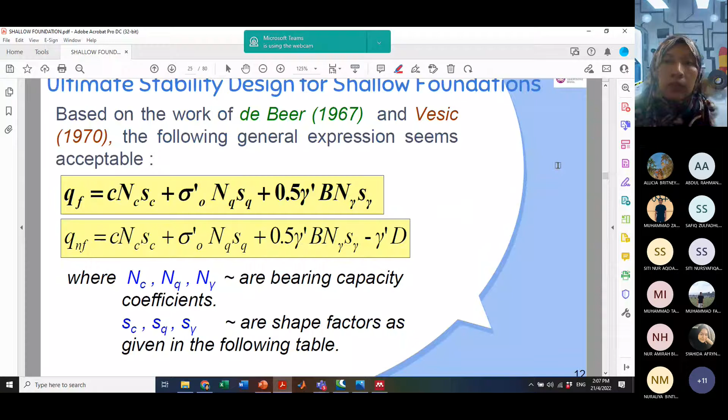So now we go to our main topic, topik 2. Dalam topik 2 ni, apa yang saya nak tekankan, dia lebih kepada applications of geotechnical engineering. For example, one of it is the foundations. Foundation ni, kalau you tengok dalam lesson plans, kita ada 2 types foundations, shallow foundations dan juga deep foundations. So for this week, it's actually on the shallow foundations. Next week punya topik kita nak estimate settlement for shallow foundations. Tapi saya bawa masuk sekali.

So saya akan explain on the theoretical part for the calculations on estimations the settlements. So I leave it for you to have your own, because next week memang you are free available just to do revisions on topic 1 dan juga topic 2. Maknanya dalam topic 1 dan topic 2 shallow foundations memang akan ditanya dalam test 1 awak. So you kena betul-betul buat revisions lah.

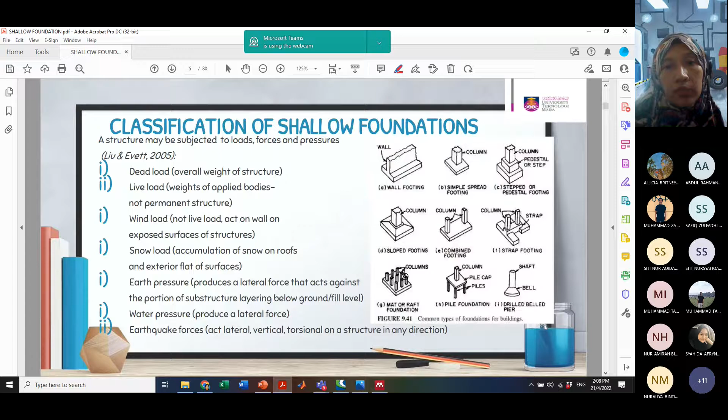Okay, kita nak pergi kepada benda mudah iaitu mengenal foundations. Dalam erti kata lain, you have to understand what is exactly foundation it is. Foundation ni is an interface element used to transmit load from superstructure to underlying soil or rock.

Maknanya, sebelum kita nak bawa beban daripada atas, dia kena ada satu medium, satu structure yang memindahkan beban daripada atas ke bahagian bawah. Bahagian bawah kat sini kita rujuk adalah tanah ataupun rock, hard rock. So apa tujuan dia? Because that is the last end platform yang loading tu akan dipindahkan ke bahagian yang terakhir. So it all depend to the soil profile, soil type.

Kalau kata soil profile you very strong, yang mana loading you pun tak tinggi, so it just enough menggunakan shallow foundation. Lagipun kalau you tengok sini, shallow foundations is stated that the requirement D over B less than 1 and then the founding depth tak boleh lebih daripada 3. So maknanya kalau kita nak excavate, nak letak foundations ni, dia punya kedalaman dia dalam kos 1 hingga 3 meter saja. Kalau kata melibatkan soil profile yang very weak, kemudian nak jumpa hard stratum layer pun agak jauh dalam, so yang tu kita kena pakai deep foundations.

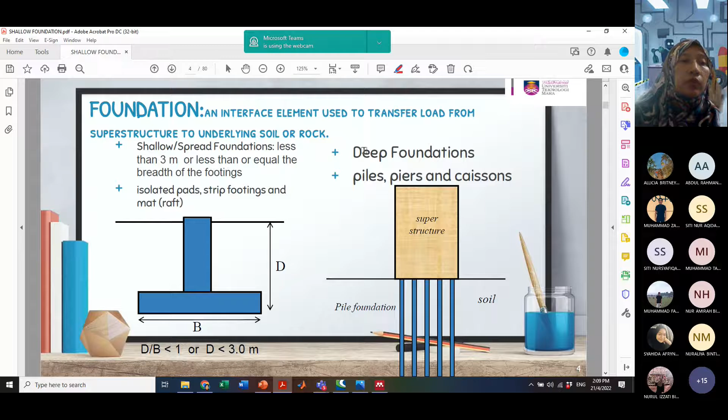Okay, belah kanan ni menunjukkan jenis-jenis shallow foundations bergantung kepada loading. Ada yang pad, ada yang strip, ada yang mat. So ada combinations juga antara pad dan juga piles. So all those depends with this kind of the factors such as dead load, live load, kemudian kita ada wind load for example. And then we have the earth pressure and lastly, for example, earthquake ataupun water pressure effect.

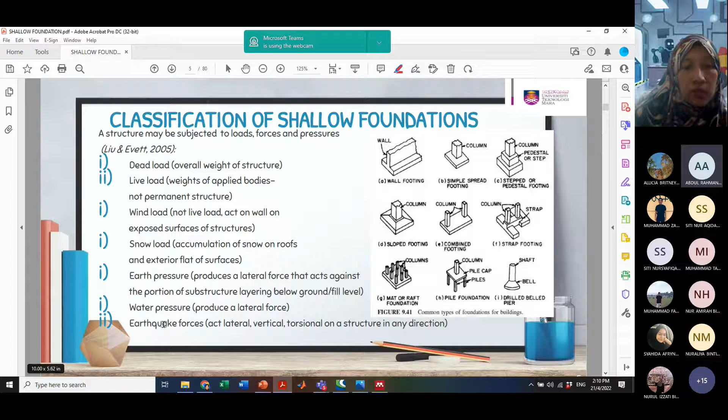Okay, when you want to design a shallow foundation lah, there are 3 things that you have to comply to the code of practice such as British Standard ataupun Eurocode. So antaranya adalah adequate depth, kemudian limiting settlement, and the next one is a factor of safety against the shear failure. So kat sini dia ada beberapa lah.

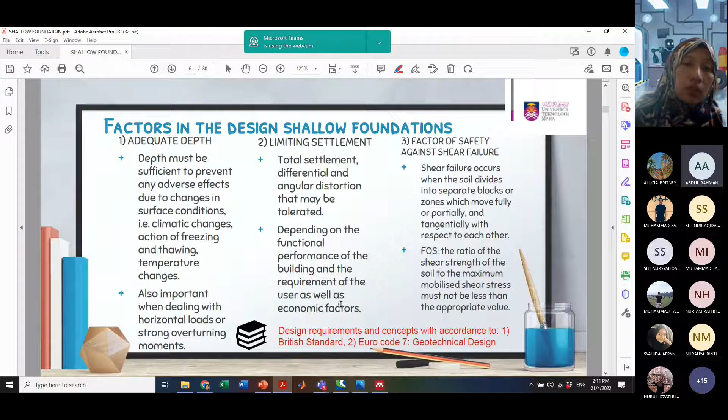Kalau adequate depth ni kita nak prevent daripada effect climate changes contohnya. Kemudian kita nak dealing with the horizontal loads. And then kalau limiting settlement ni kita nak avoid from total settlement ataupun differential settlement. Kemudian kalau kata factor of safety ni kita nak tengok shear failure ni ada dalam pelbagai bentuk modes failure lah.

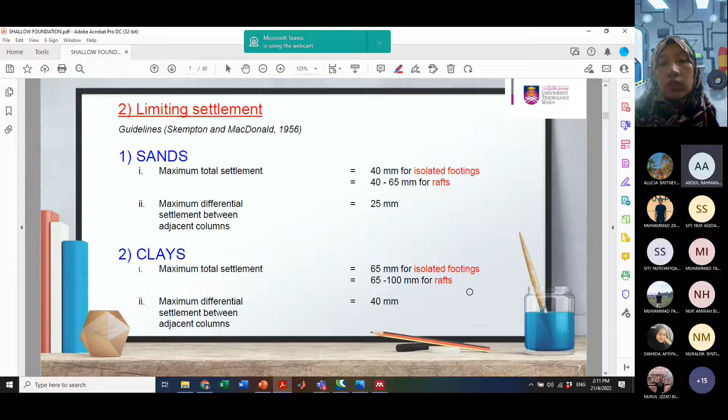Okay, ini contoh kalau kata limiting settlement. Contohnya foundation you atas sand. So isolated footing pads ni dia benarkan limiting settlement hanya 40 mm. Kalau kata footing you on clay untuk isolated footing, so the maximum total settlement yang dibenarkan adalah 65 saja.

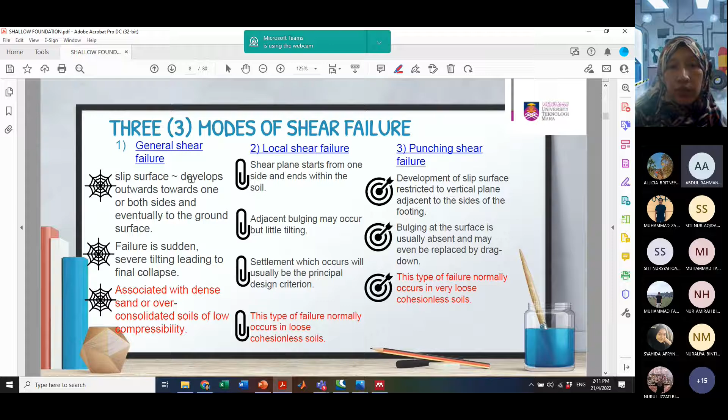Untuk kita kaitkan faktor yang ketiga iaitu FOS against the shear failure. So ada 3 jenis mode of shear failure. Okay, dalam mode of shear failures ni you have to look at closely lah. Setiap jenis mode failure ni berbeza mengikut jenis tanah.

Contohnya kalau you ada dense sands ataupun over consolidated clay, bila you letak footing on this kind of the soils, this is the failure pattern that give to you. Some having bulging outside of the foundations. Kemudian you akan ada some plastic failure zone. Ini untuk general shear failure.

Whereby kalau you letak foundations on the loose sand for example, you may see that the footing move downward having a little or small bulging or tilting but not so obvious compared to this general shear failure.

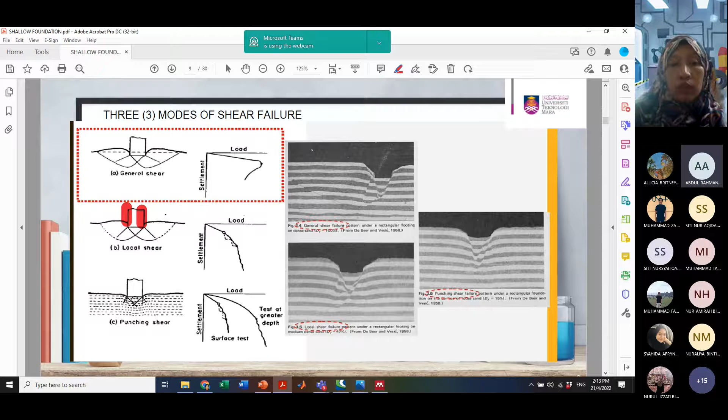Kemudian kalau kata you letak footing pada very loose sands, mana dia punya void tu terlalu besar dan dia terlalu longgar, so you akan nampak tanah tu mengakibatkan pergerakan jatuh footing tu ke bawah. So at this particular time, dia punya plastic failure zone pun dah tak berapa jelas ada. Kemudian the bulging or tilting effect pun there is no more. Maknanya dia dah digantikan dengan drag down effect.

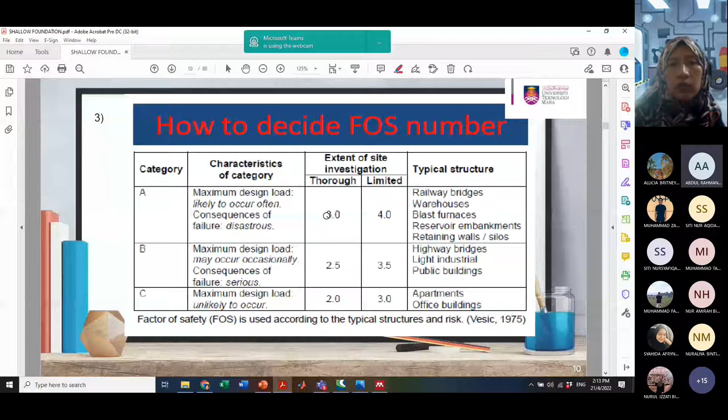Okay, what are important things about the foundations, kemudian the modes of failure, shear failure semua tu, dia nak bagi tahu what these kinds of different soil type will give you different soil failure. Maknanya kalau you ada dense sands, kita boleh assume the general shear failure will take place. Kalau you ada loose sand, there is possibility for local shear failure. Whereby if you have very loose sands, there is a chances to have punching shear failure. So punching shear failure ni adalah something that you have to consider when you design footing foundations ataupun concrete footing lah. You kena masukkan dalam you punya analysis design.

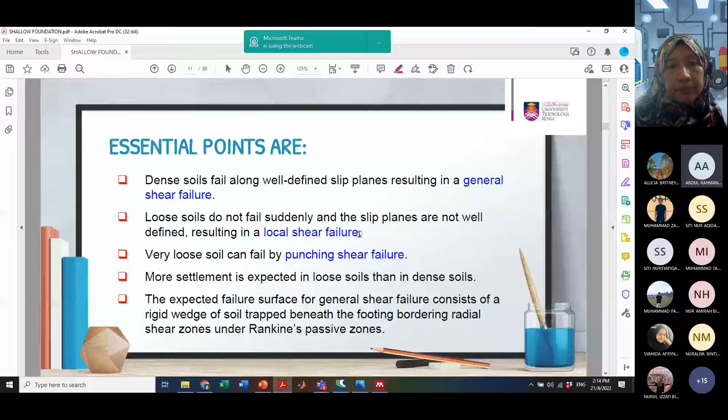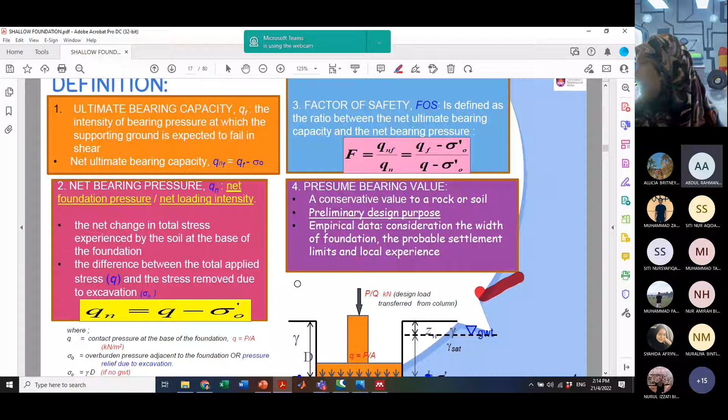Okay, yang tadi tu very general explanations on the foundations. Kemudian kita nak faham dia punya term and formula. Dalam this case, ada beberapa formula term yang you kena look at closely lah, in terms of dia punya definitions, in terms of dia punya symbol.

Okay, for example here, what is the net, or what is the first one, ultimate bearing capacity? QF. Ada setengah buku dia menggunakan QU. So QF, QU benda yang sama lah. Kita merujuk kepada ultimate bearing capacity. So it is an intensity of bearing pressure at which the supporting ground is expected to fail in shear.

Whereby the net ultimate bearing capacity is a condition yang mana the ultimate bearing capacity subtract dengan overburden pressure. Okay, overburden pressure ni saya harap every one of you understands lah. Dia adalah stress relief from excavations. So berapa tegasan yang dah berubah daripada asal sebelum kita letak footing dan selepas kita korek tanah letak footing.

So footing ni tak semestinya berada on the ground surface. They can be founded a few meter below the ground surface, for example here. So in that particular formula, bila you nak calculate overburden pressure ni, you have to check on the influence water table effect lah. So you kena tengok, kemudian you nak calculate contact pressure ataupun net bearing pressure ni, you have to check on the contact pressure Q, kemudian overburden stress.

So the contact pressure Q is counted at the base of the foundation. Maknanya at the base foundation ni kita boleh panggil dia sebagai contact pressure lah. Kalau you tolak dengan overburden pressure, yang tu baru kita panggil net bearing pressure, QN.

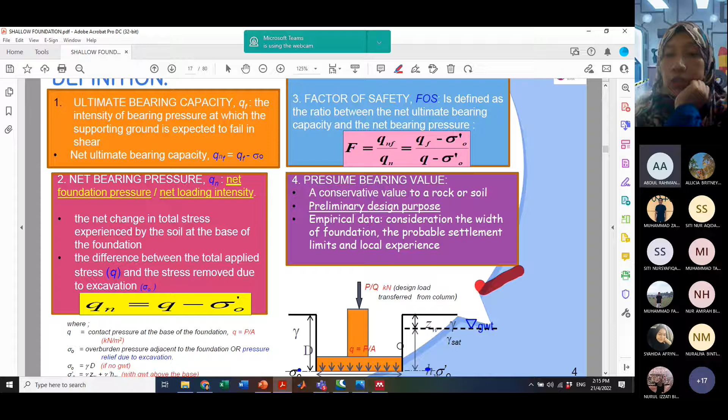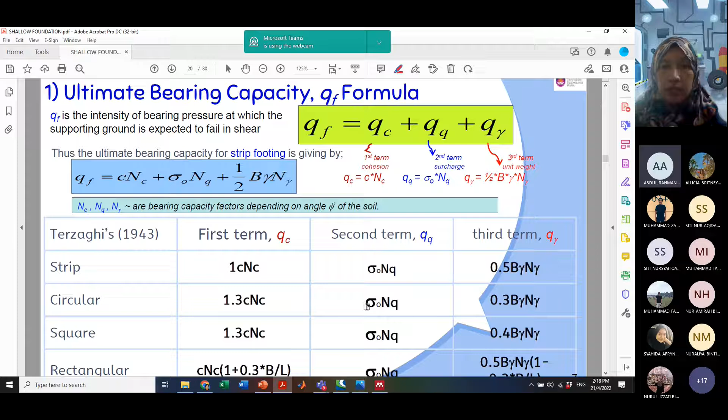Kalau kata you ada circular footing, so you kena guna formula bawah ni lah. 1.3 CNC plus overburden stress NQ plus 0.3 width gamma N gamma. So yang ni kena hati-hati lah bila nak guna formula dia. Dengan main masuk tak tengok apa, tak baca soalan.

Macam ni dia memang dah tulis dah. The ultimate bearing capacity for strip footing is given here. Kalau ada rectangular footing, ini formula bawah dia. So read question carefully.

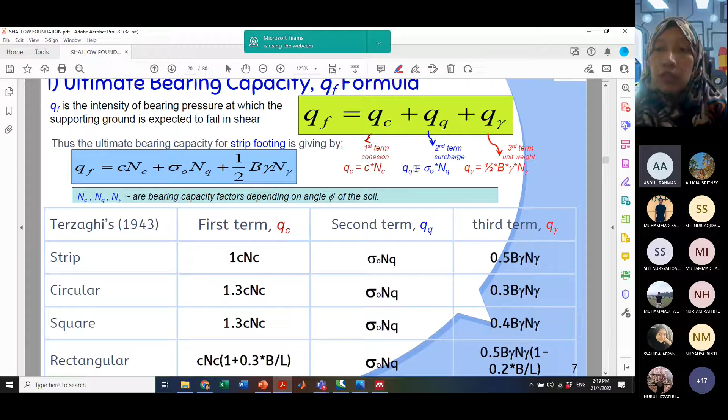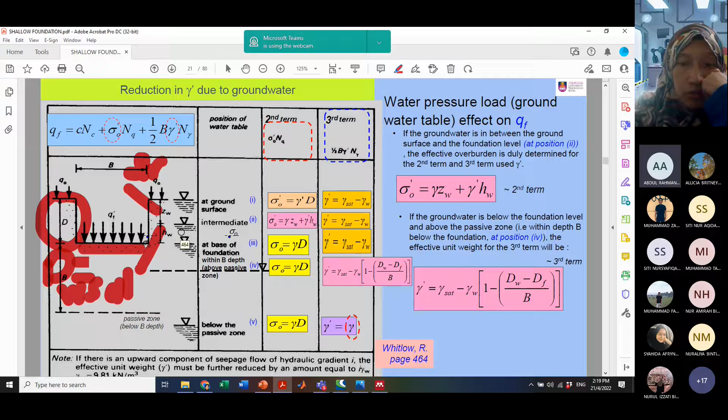Okay, as I explained earlier, for the contact pressure ke, ultimate bearing capacity ke kan, kalau you tengok kat sini, kita ada term 2 dan term 3 yang akan ada effect daripada water table. So we want to know how to calculate term 2 and 3 once it has effect from water table. So there are 5 cases differently showing to you the term for that effective overburden dan juga effective unit weight. So apa yang berlaku? Saya nak you perhatikan betul-betul lah dia punya formula tu. Kalau kata you tak hafal formula ni, you just understand dia punya konsep pun dah mudah lah sebenarnya.

Itu yang saya nak cuba sampaikan.

Okay, contoh kalau kita tengok kes pertama. Kes pertama water table at the ground surface. So apa yang kita boleh kata, tanah yang bawah daripada permukaan tanah ni semua akan dalam keadaan wet conditions. So kita akan ambil dia sebagai γ'D. Bila nak calculate overburden pressure, dia akan ambil efektif lah. Effective unit weight darab dengan D. Dia bukan darab dengan ZW ke ataupun HW.

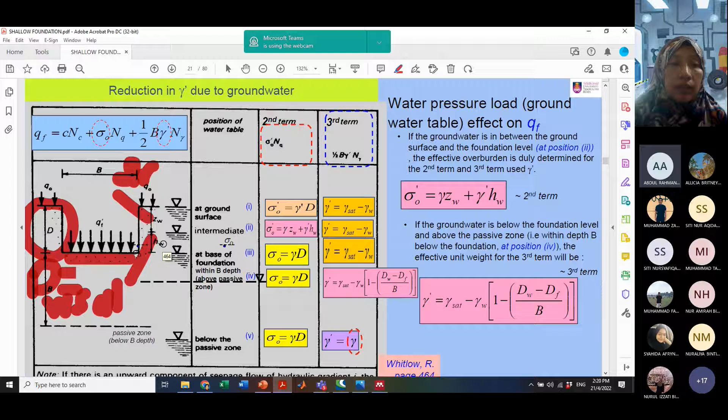And then bila kita nak tolak dengan water unit weight of water, saya nak ingatkan pada anda semua, kita menggunakan nilai 9.81 lah. So I don't want you to use 10 kilonewton per cube meter. I want you to stay on this value supaya dia boleh bagi consistent answer to all of students.

Okay, untuk term number 3, bila kita ada case pertama, sebabkan footing ni berada pada this layer of soil, and then the layer of soil that carried a load from footing ni dalam keadaan wet conditions, so the unit weight here must be in effective unit weight lah. So dia kena minus dengan 9.81.

Similarly for case number 2 dan juga case number 3. Case number 2 ni yang mana air berada beberapa meter daripada permukaan tanah. So term number 3 pun masih lagi ada influence effect of water. Similarly at case number 3 yang mana water table at base footing. But you have to be careful bila kita nak calculate term number 2 dan juga term number 3.

Contohnya intermediate ni, kalau you tengok separuh tinggi ni ada air, separuh lagi tak ada air. Maknanya kalau you nak kira overburden stress ni, kita akan ambil dua kedalaman lah, satu ZW, satu HW. ZW mewakili dry condition, HW mewakili wet conditions. So bila kita calculate dengan ZW, kita akan pakai unit weight yang biasa, dia tak perlu tolak dengan 9.81. Tapi kalau kita kira below the water table effect ni, kita kena tolak dengan 9.81.

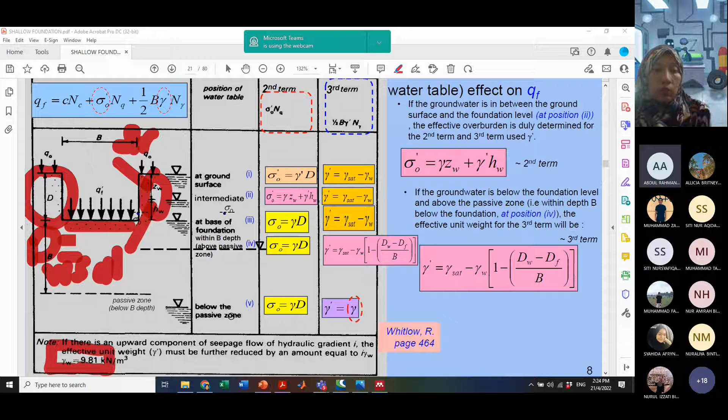Okay, case number 5 is more easiest lah antara case-case yang lain. Yang mana, bila you tengok the water table below the passive zone, it means that, atau erti kata lain, is well below, so quite far. There is no effect of water table to the term number 2 and term number 3. So kita boleh kira dalam total overburden stress dan juga total unit weight.

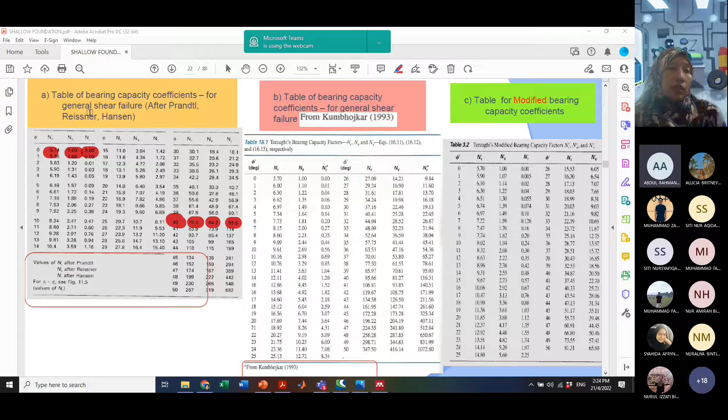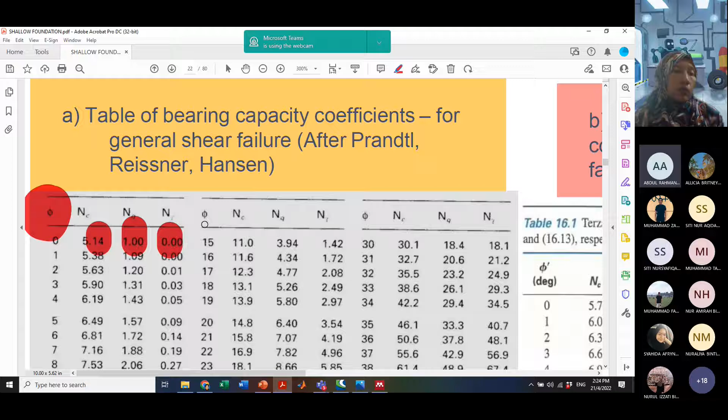NC, NQ, and gamma dia bergantung kepada nilai phi. Kalau kata you baca soalan, foundation is laid on the phi equal to 0. So senang je, you pergi dekat row yang menunjukkan phi kosong. Kemudian you akan dapatlah NC dia 5.14, NQ 1, and gamma kosong. Itu yang dimaksudkan NC, NQ, and gamma dia bergantung kepada nilai phi.

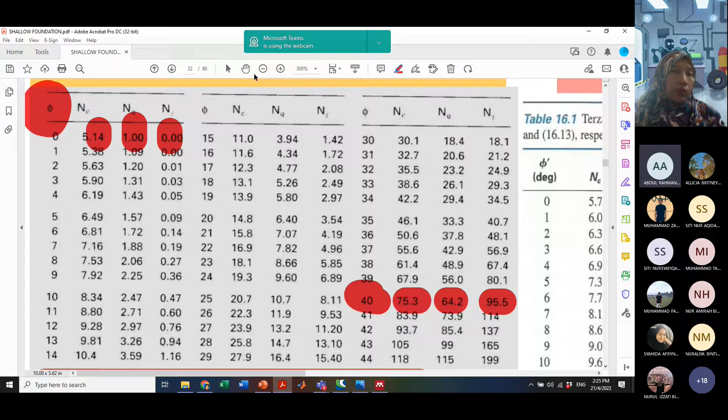If the question says that it is laid on the sand dengan phi 40 degree, so you boleh lah pakai 75.3, 64.2, 95.5 untuk factors, bearing capacity factors. So table yang berikut ni benda yang sama jugalah. Satu yang modified, satu lagi daripada Terzaghi's punya modification by Kumbhojkar 1993.

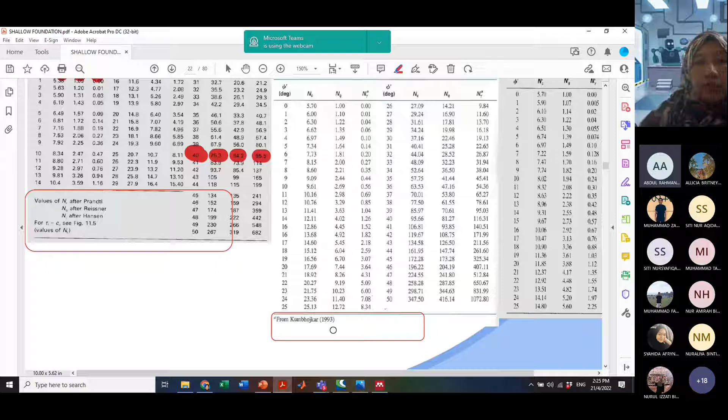Somehow in situations yang kita nak lebih specific kan lah. Sebenarnya kalau you tak specific pun you dah boleh nak faham lah kan. Sebab kita ada two conditions of soil, satu coarse grain, satu lagi fine grain. If you place shallow foundations on the coarse grain, let's say we assume as a pure sand dengan C sama dengan kosong kan. Bila C sama dengan kosong, you have some values of phi, of course you akan ada nilai NC, NQ, and gamma. Tapi, bila you masukkan balik dalam term 1 dengan C sama dengan kosong, automatically, if you look at this formula, there is no more term number 1 iaitu c Nc.

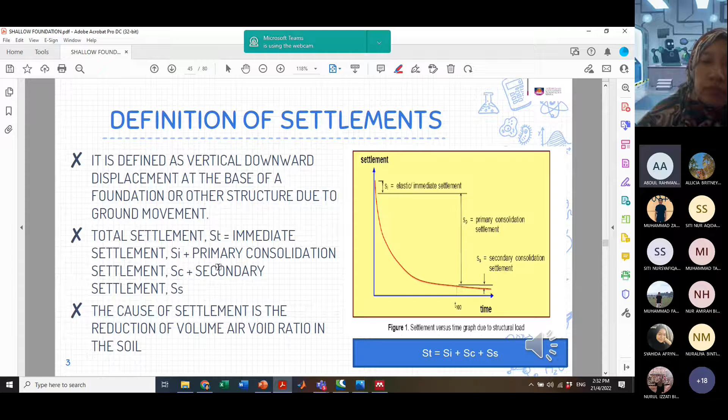Okay, apa contoh-contoh ataupun faktor yang mempengaruhi settlement. Sebagai contoh yang boleh kita tengok, daripada direct causes, for example dead load, live load. Kemudian daripada indirect causes, earthquake, etc.

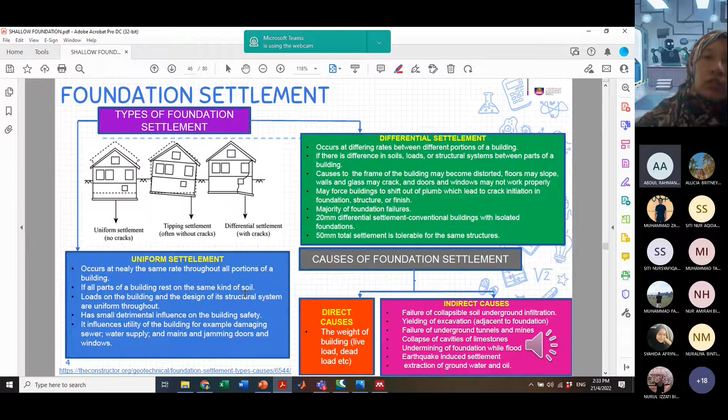Settlement ni kita boleh kategorikan sebagai uniform settlement ataupun differential settlement. Uniform settlement selalunya tak teruk, tak bagi hasil crack, maknanya nilai settlement ni adalah sama. Tapi bila some amount of displacement is very huge, you akan ada some cases di mana berlakunya rekahan pada struktur bangunan. So kat situ you have to take seriously major repairing work ataupun rehabilitation work to overcome the worst conditions of cracks.

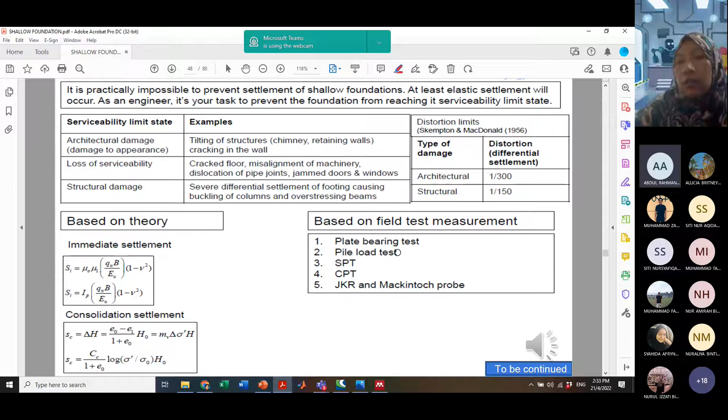Okay, settlements ni it can be measured from the theoretical ataupun from the field test measurement. Kalau daripada teori, kita pakai immediate settlement, kita boleh pakai consolidation settlement. Whereby from the field test kita boleh ambil daripada 5 testing, sama ada plate bearing test, pile load test ataupun JKR Mackintosh probe.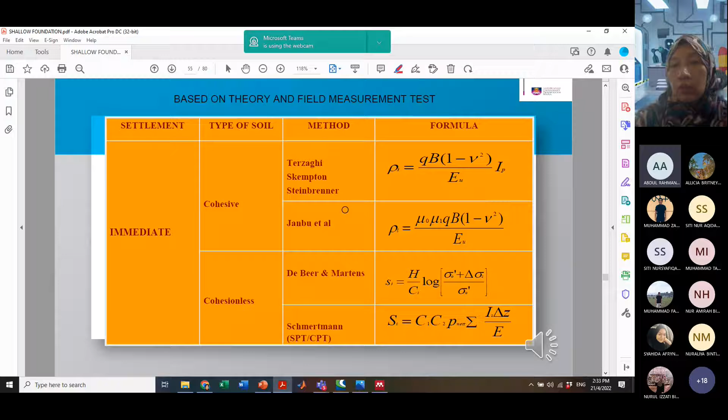Okay, the next slide showing to you the formula used to calculate or to estimate the settlement whether from theoretical ataupun from the field test. Kalau daripada theoretical, if you want to estimate immediate settlement, if you remember dalam topik soil mechanics ni, kat situ you hanya belajar influence factor due to the difference changes in effective vertical stress. Tapi bila kita tengok balik, perubahan vertical stress tu adalah disebabkan oleh tekanan yang dikenakan kepada tanah tersebut. Tekanan tu boleh datang daripada loading.

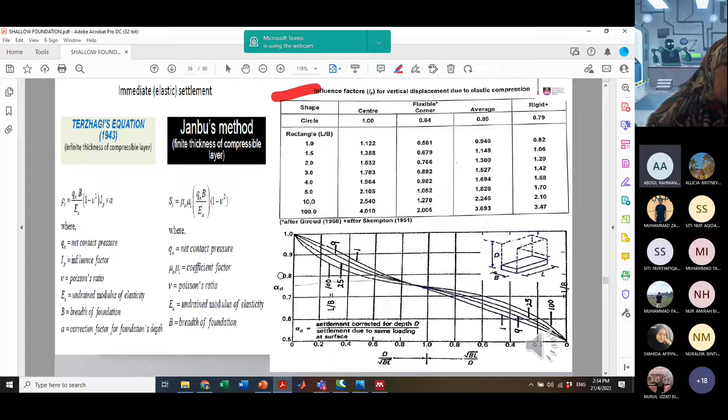Loading at this particular time, kita consider loading coming from the foundations. That's why kat sini you can see that the foundations ada yang jenis flexible foundation, ada yang jenis rigid foundations. Foundations tu pula, it can be placed or located at the center ataupun at the corner. So bila you nak pakai Terzaghi punya equation, this is the influence factor yang you kena consider dalam dia punya formula untuk calculate immediate settlement, as well as the correction factor for foundation depth. So you have to look to this table dan juga this chart. Kalau Janbu, kena tengok yang ni lah, chart yang seterusnya.

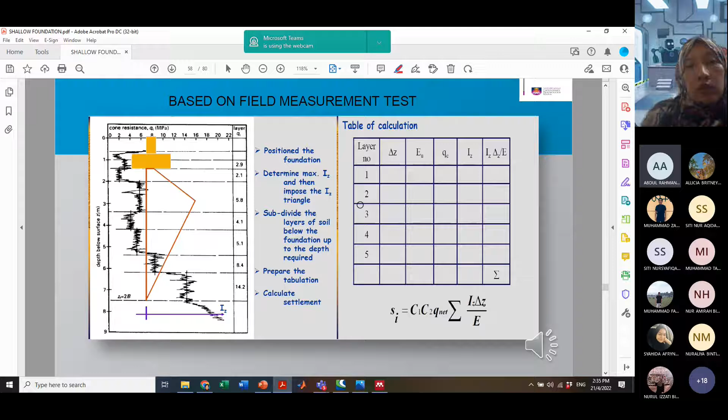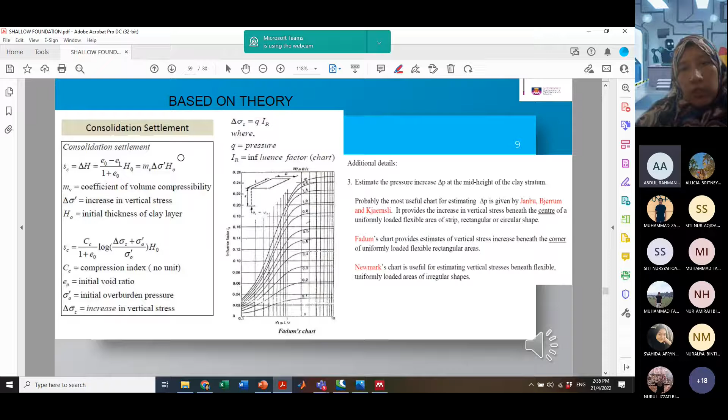Okay, untuk based on field measurement test, CPT ataupun SPT. CPT ni dia berbeza sikit, yang mana awak kena divide layer into few. Kemudian dapatkan dia punya influence IZ, influence factor dia. Kemudian you multiply, and then you total up dengan all these particular symbols. Masukkan cone resistance, kemudian you akan dapatlah the immediate settlement from the CPT test. Okay, yang ni daripada teori lah. Teori ni saya tak explain sebab dia basically sama dengan macam you dah belajar dalam topik soil mechanics.

Okay, next on plate bearing test. Plate bearing test ni selalunya kita buat untuk dapatkan load settlement curve. Bila kita penetrate on soil, dia boleh bagi you reading berapa antara loading dan settlement value. Letak beban 50 kN contohnya, berapa nilai settlement? Increase the loading, adakah settlement tu meningkat ataupun dia static? Kalau you place on the soft soil, you akan nampaklah settlement increase by loads. Tapi kalau kata you letak plate loading ataupun plate bearing test ni pada hard layer, so you akan nampaklah even you increase the loading, settlement taklah pergi terlalu tinggi ataupun jauh.

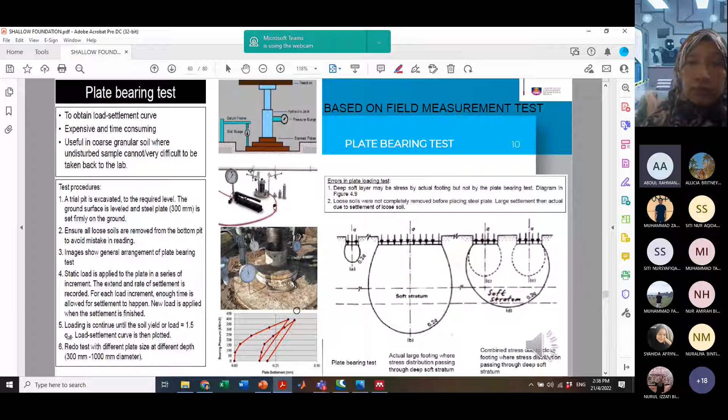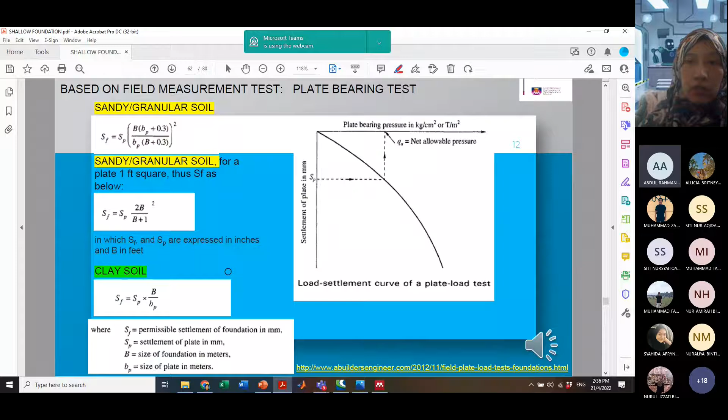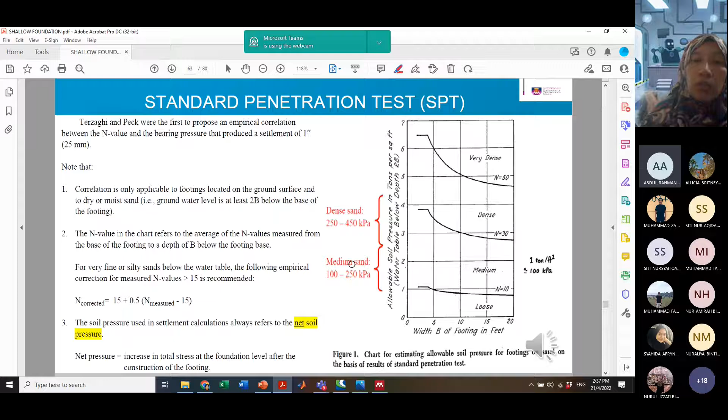Okay, the empirical formula for plate bearing test, this is how we can calculate. Ini pun I leave it to you untuk have your own revisions. So same goes to the SPT, standard penetration test. Remember from topic 1, bila you belajar standard penetration test, there's counted by N value number. So the N value number indicates to you the soil type dengan soil profile, sama ada soil tu strong ataupun weak. Dia ada particular formula untuk sand ke ataupun untuk clay.

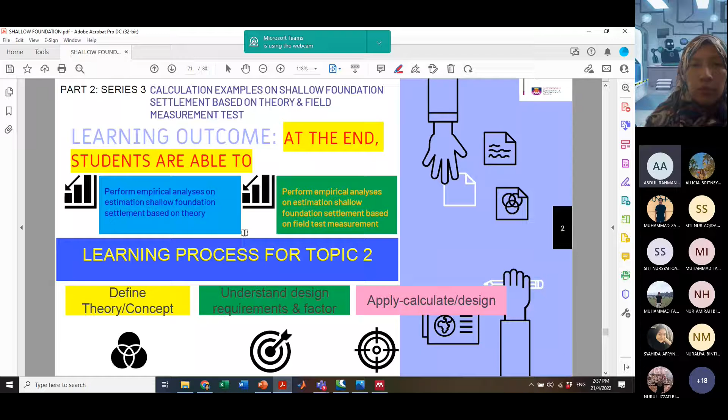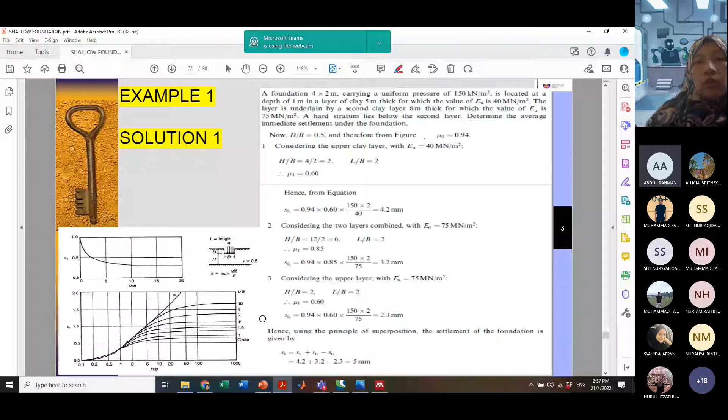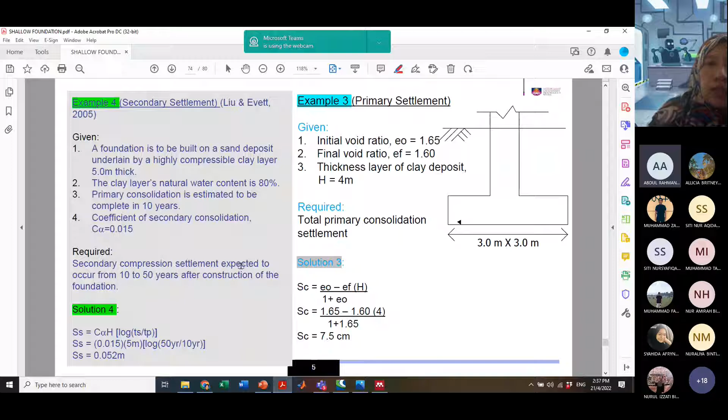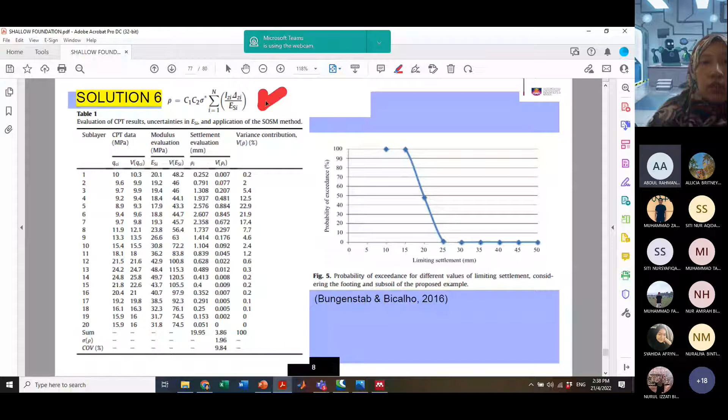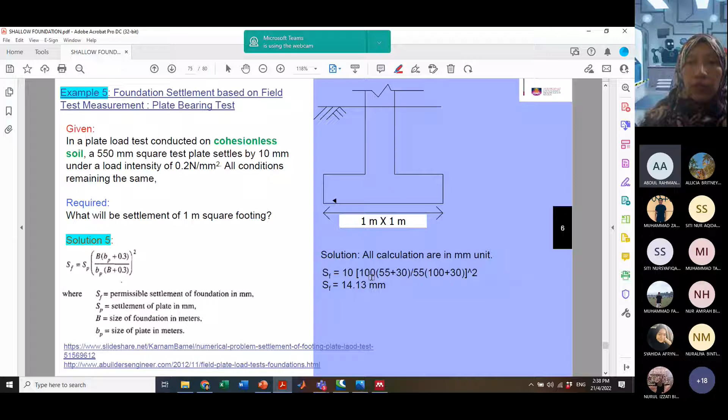Okay. From the theoretical or explanations, do you have any questions before we go to the example of calculations?

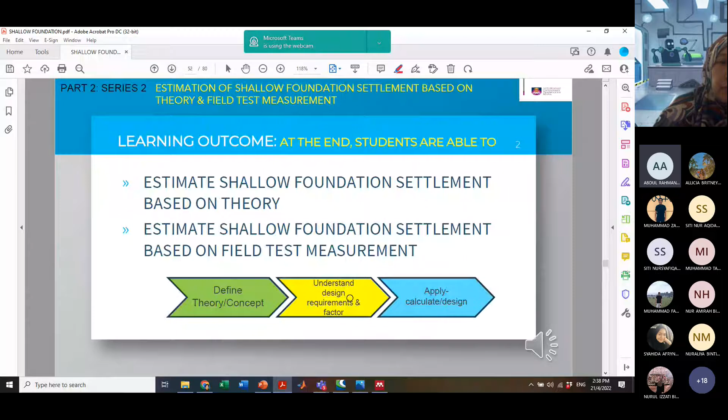As I said, I would like to concentrate on example 1 and example 2, the applications from the concept on ultimate bearing capacity using the Terzaghi formula. For the other formula types like Vesic or Meyerhof, I will not cover those since I just want you to understand the first concept - how to calculate ultimate bearing capacity with the effect of water table, etc. And then how to determine the FOS, and then how to get the allowable bearing capacity and so on.

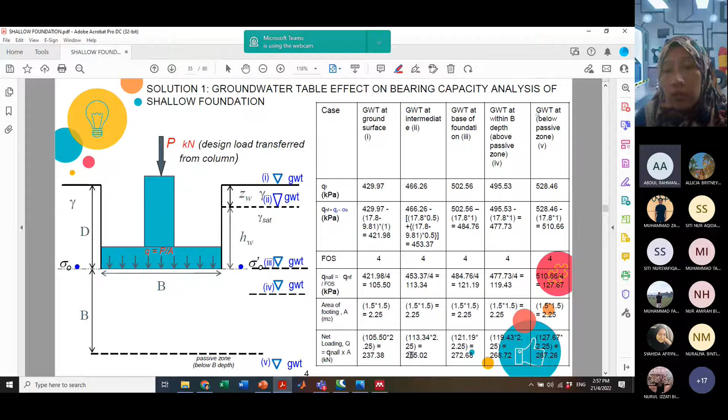Okay, the next one, since we are looking for the Q, the net loading ataupun net intensity loading capital Q, so from the area of the footing, kemudian the net allowable, we can rearrange balik the equations. So the net loading Q is equal to Q net allowable times the area of the foundations. Area of the foundation 1.5 darab dengan 1.5, so you akan dapat 2.25 meter square. So you have obtained all the loadings, all different according to the effect of water table.

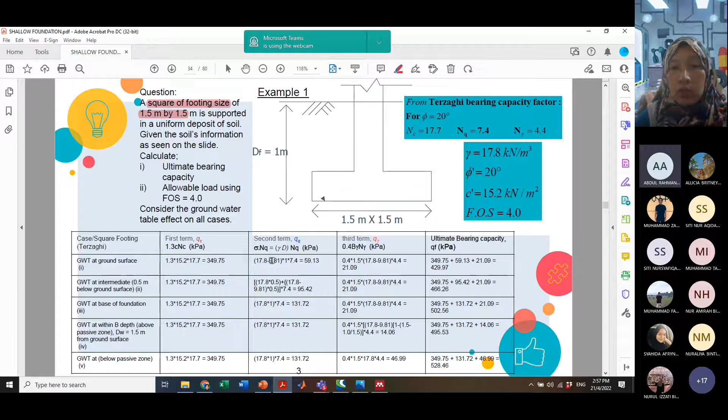I hope that you understand the solutions for example 1, yang mana quite straightforward sebab dia tak ada tricky sangat. Okay, untuk example number 2 ni, it's a bit different compared to example 1.

Yang mana you are given one problem with the unknown, iaitu the size of the circular footing is not known. So you tak tahu berapa size footing tersebut. Tapi you diberitahu loading from column 1.4 meganewton, founding depth is 1.2. So by taking FOS 2.5 dengan keadaan water table well below, so what is the size of the circular footing?

So bearing capacity factor pun dia dah bagi. So the next case dia minta you calculate the new factor of safety jika air penuh dekat kawasan yang kita letak footing tersebut. Maknanya 2.5 ni bukan lagi factor of safety untuk case number 2.

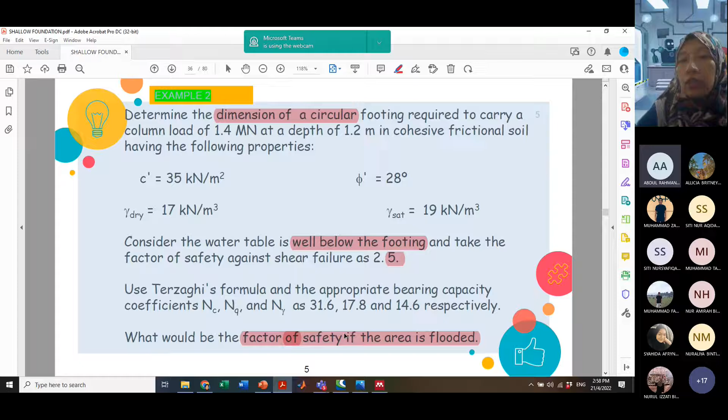Okay, ini adalah solutions dia. If you can see from here, sebabkan dia dah mention yang mana water table is well below, so you can see from term number 2, term number 3, semua dalam keadaan total overburden stress dan juga total unit weight. Semua pakai 17, so dia tak tolak dengan 9.81, sebab dalam soalan tu dia dah sebut well below.

But the only thing is that it is unknown, unsolved. So ada B dalam QU, so you kena dapat what is the B. Since we want to calculate the next one is the B size from the loading intensity ataupun from the allowable net bearing pressure, so we have to estimate the net allowable bearing pressure from ratio between net ultimate bearing capacity over factor of safety.

So this one, why is it minus overburden pressure? Because we want to get the net. So we divide by 2.5. This one reduced to 712.28 plus 29.78B. Keep remaining unknown, meaning B value we still don't know.

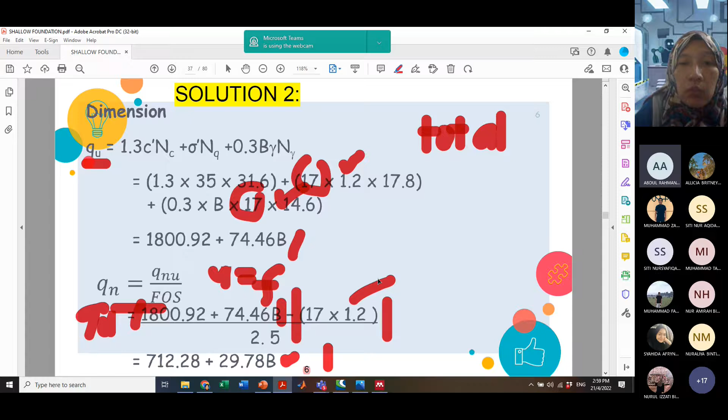So the B must be equal to some equations or assumptions that the intensity loading or the contact pressure Q is similar to the allowable net bearing pressure. Once you settle it down, you rearrange the equations back, and the final answer for the size of circular footing is 1.51 meter. So we have done that first part.

Okay, for the first one we already solved. Second one is you have to find what is the new factor of safety for the new case where the footing is fully flooded, submerged completely in water. So at this particular time, the ultimate bearing capacity for term number 2 and term number 3 will be affected due to the water table effect.

So here you will see it calculated as effective overburden pressure and also effective unit weight, and it gets the answer as 1694.88 kilonewton per square meter. But still unsolved, because the question asks for factor of safety, so it just stops at ultimate bearing capacity.

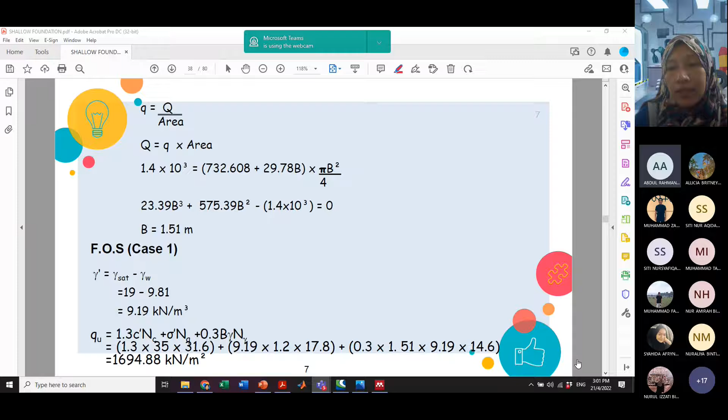So the next one, I want everyone to calculate what is the answer for FOS. Please give me the answer, one boy, one girl, the value of FOS. I want the answer from Nik Aidil and also Nur Aina Safi. How do you calculate it and what is the final FOS?